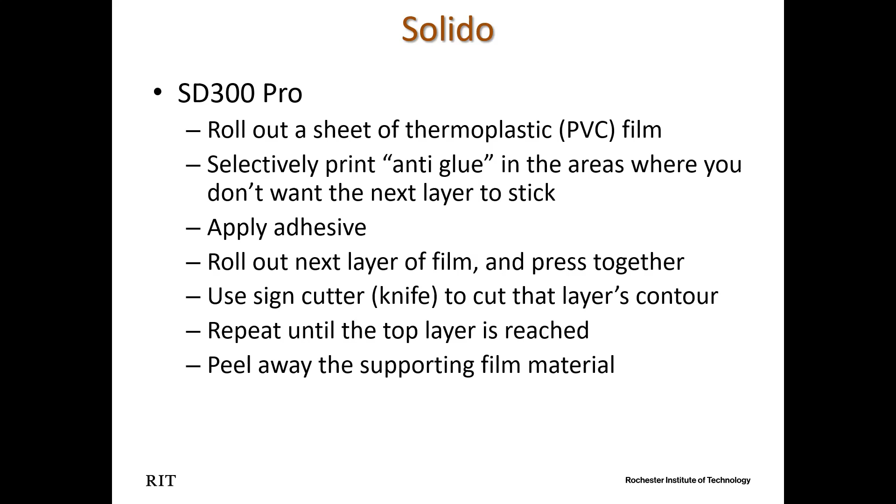Basically the idea is still to print the contour and attach the layer to the next one. And there are different mechanisms to realize this process. And specifically in this one, an anti-glue is applied to prevent the adhesion between some of the regions and the next layer. That's how it works. So we can take a look at the video.

First, insert the engineered plastic roll into the printer. The engineered plastic roll used in the SD300 Pro is both durable and economical, giving you attractive build cost per model. Second, insert the glue cartridge.

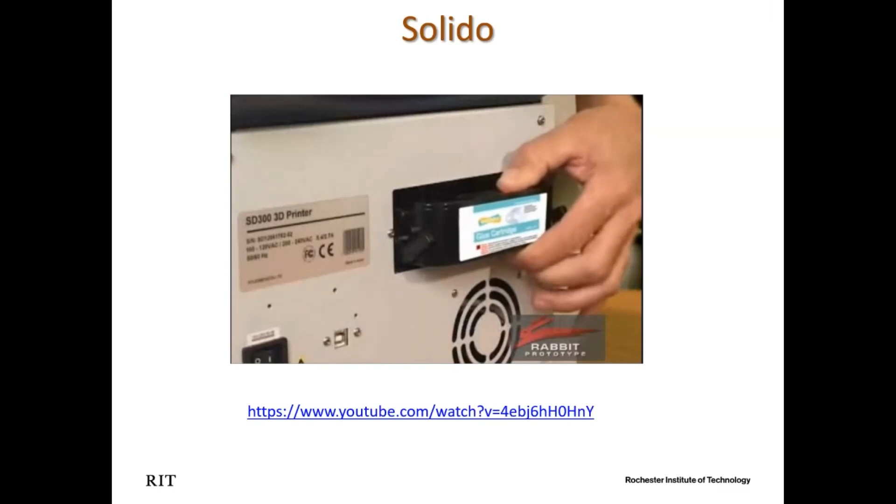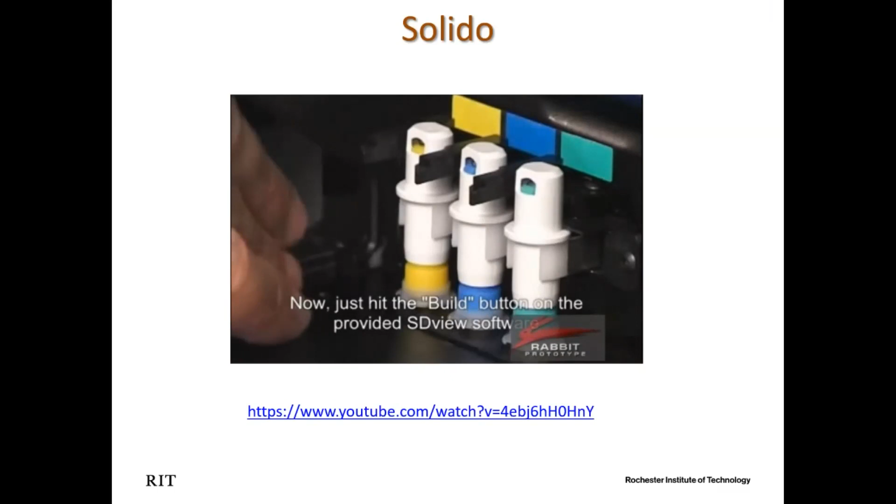Third, insert the anti-glue cassette. Finally, place the 3 anti-glue pens. Now just hit the build button on the provided SDView software and your printer is off.

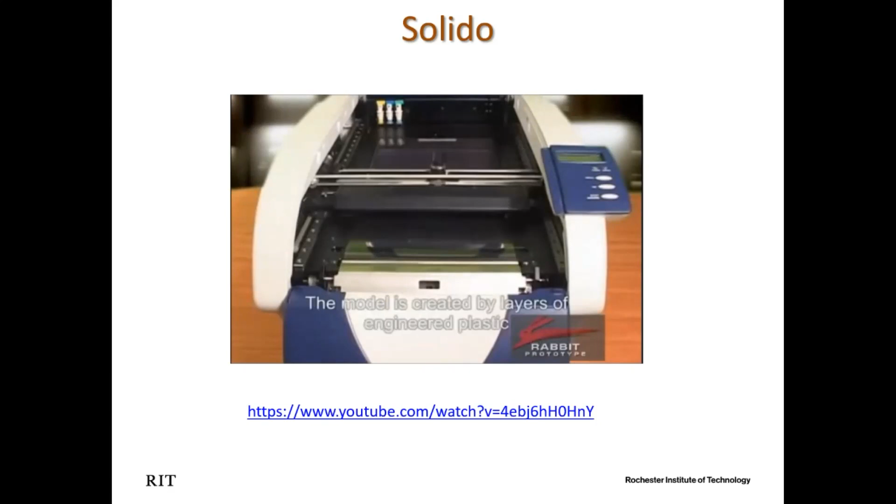Finally, a 3D printer you can afford. The model is created by layers of engineered plastic. Following sheet lamination, the cutting knife goes to work directly from your CAD data. The engineered plastic roll is layered using special glue, resulting in strong yet flexible models.

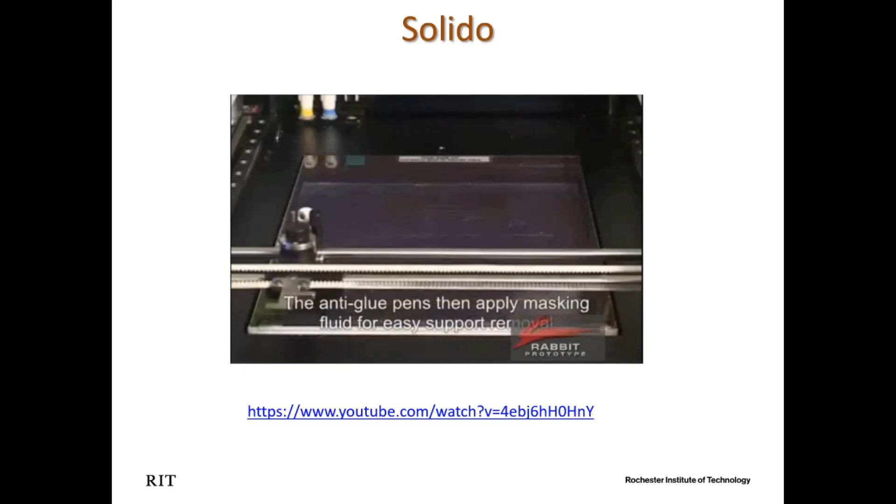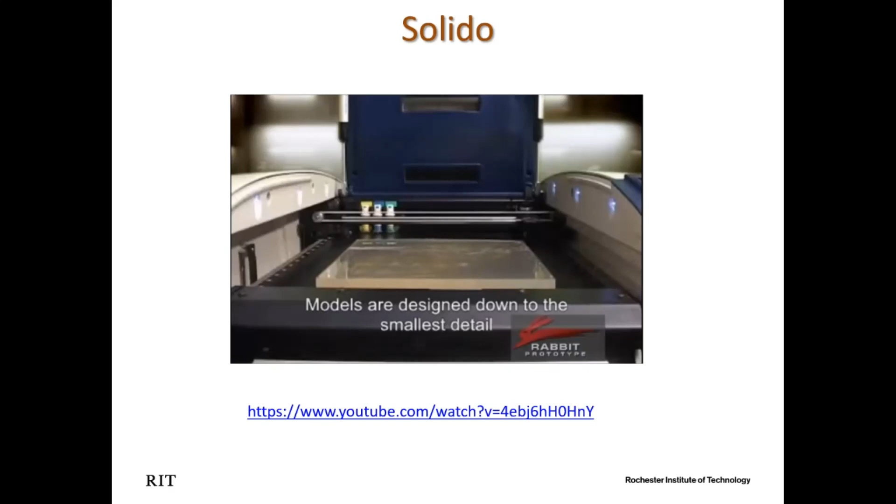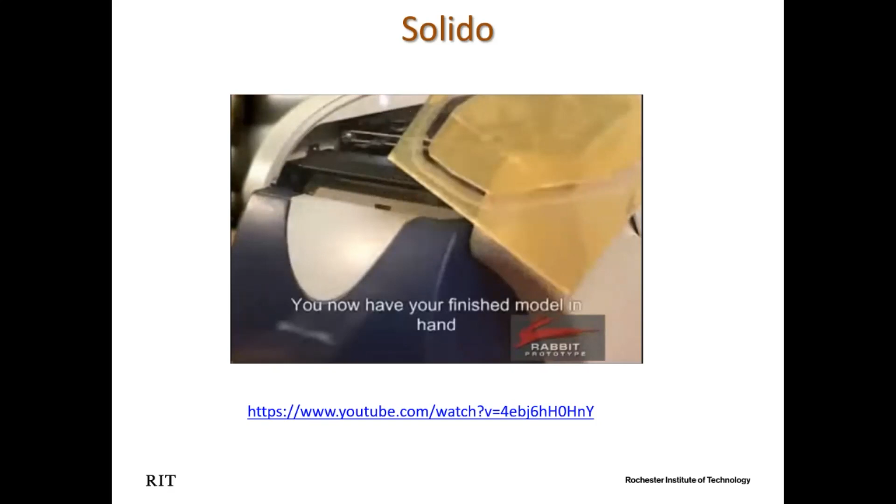The anti-glue pens then apply masking fluid for easy support removal, allowing even the smallest details to be created. Reducing development costs and time to market. Models are designed down to the smallest detail, and the engineered plastic roll is available in transparent or opaque colors. You now have your finished model in hand, ready for evaluation, without ever leaving the office.

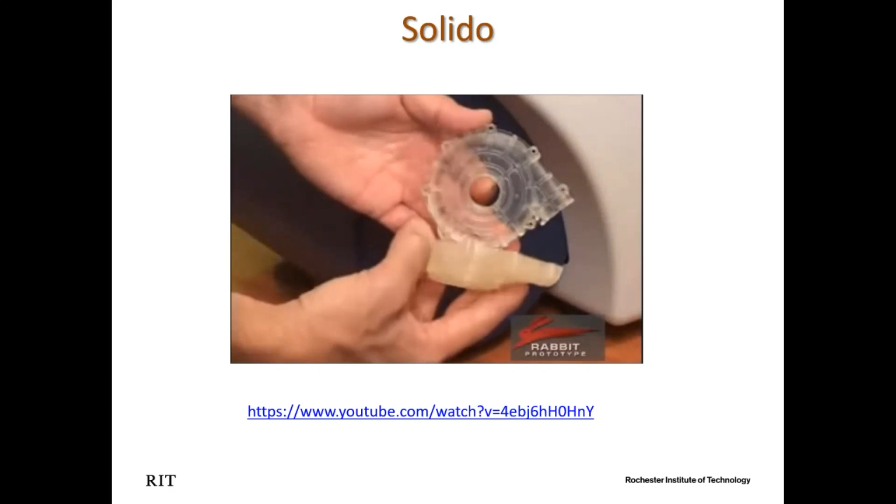Well, I would say it's a little waste of material, right? So for such a big kind of a block, only this small piece is taken out. So it's a little wasting of material, but that's how it works.

And so basically, the parts that can be built are limited to the thermoplastic material, and also there could be some post-processing to remove the adhesives or the glues, right? Basically, these glues can be completely melted in the solvent, such that they could be removed entirely after taking out from the printers.

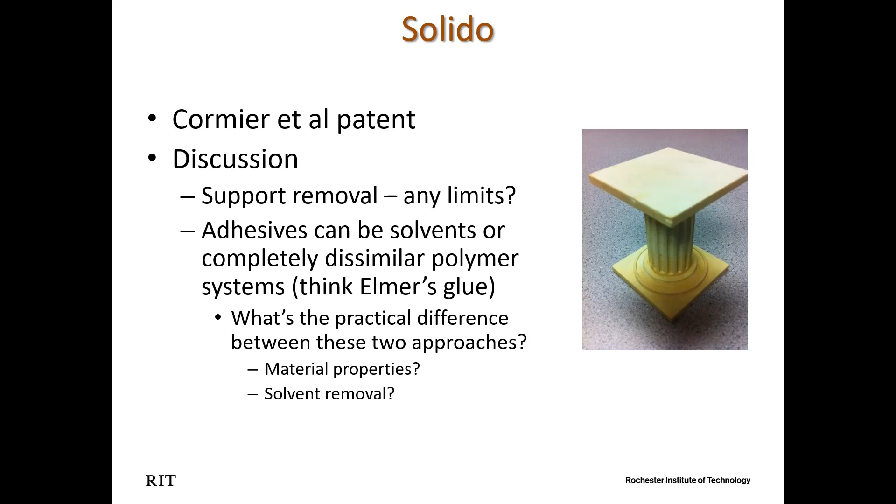Because it's a thermoplastic, you can imagine the material cannot bear too high temperature, right? And also the material property compared to other, I would say, better plastic or polymer material is limited. It's similar to what we had in the fused deposition modeling machines, because it turns out the material is very similar to what we use there, right?

Also, there are some composite sheet laminations. So what it does is there will be an inkjet printing head applied, it deposits the polymer powder onto the printed sheet, and then some of the dry polymer powder will be removed. Also, the stacked sheets will be heated up to make the material melt, and then these layers will be compressed and stick to each other.

And after all, the unbonded portion of the sheet fibers will be removed, and it turns out you will have a final shape. So by doing so, you have different materials combined together, such that you will have a polymer object, right? So this machine we talk about here is the Impossible Objects machine,

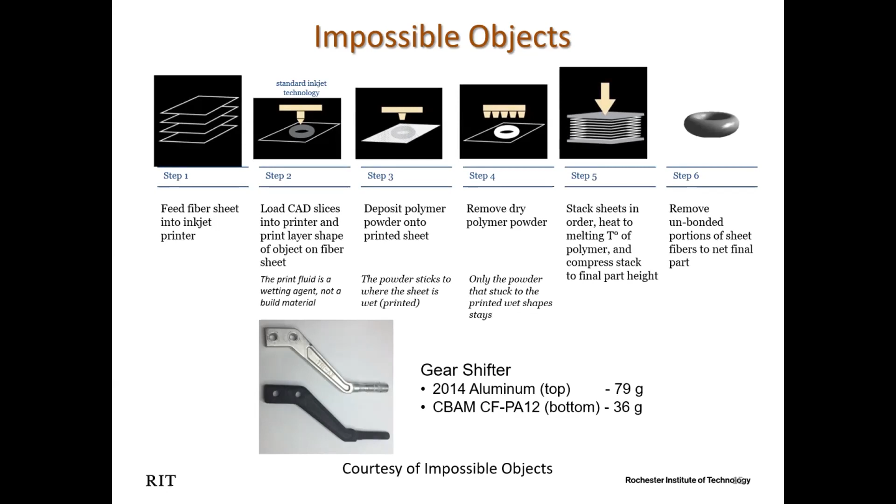and actually there's one in our lab, which is at the end of the Brinkman lab. I mean, there's a door over there, right? And you get in there, there is an Impossible Objects machine sitting there. And let's take a look at the video.

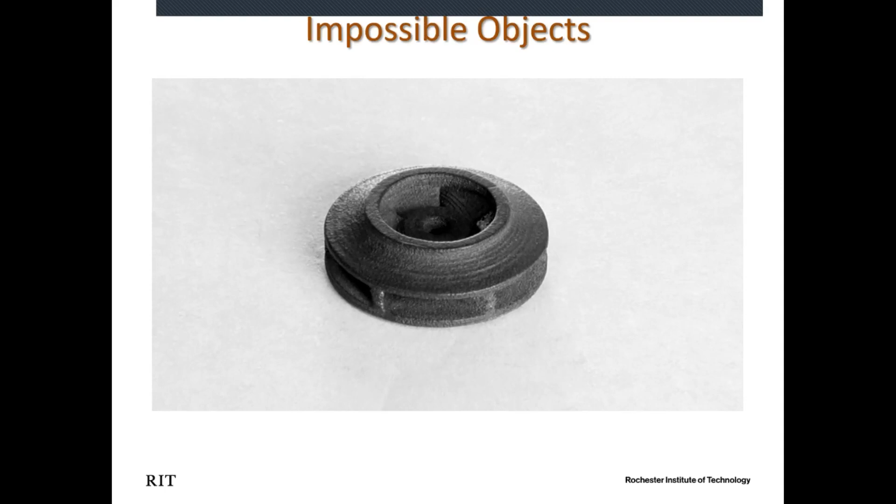Impossible Objects technology enables additive manufacturing of fiber-reinforced composites for making production parts. The CAD model is sliced into layers, and each layer is converted into a digital bitmap. Layers are printed onto fiber sheets using a clear fluid and thermal inkjet technology, and a high-precision positioning system guides the inkjet heads.

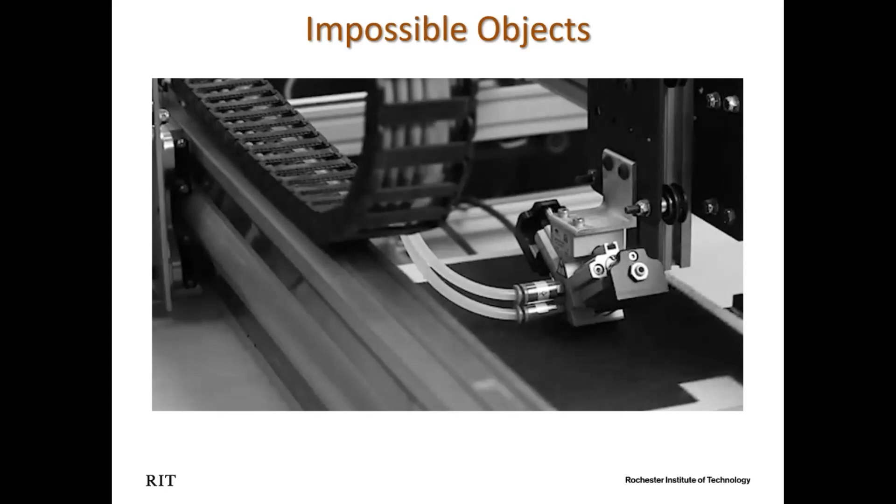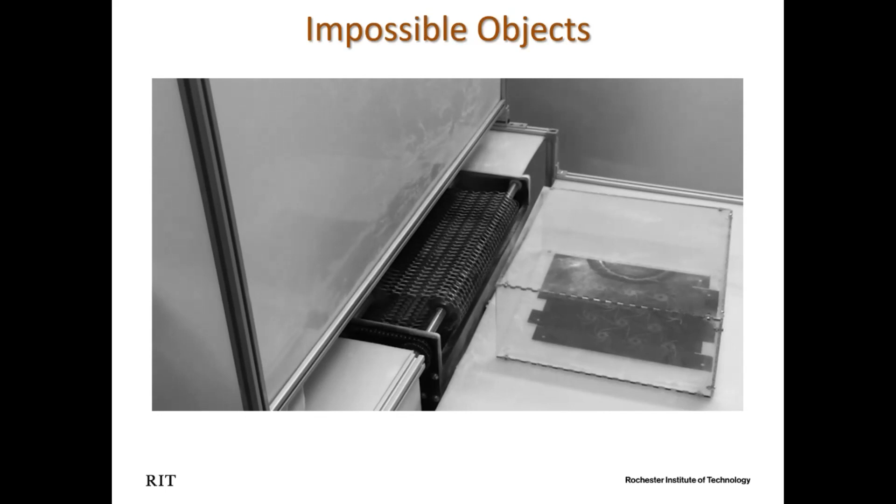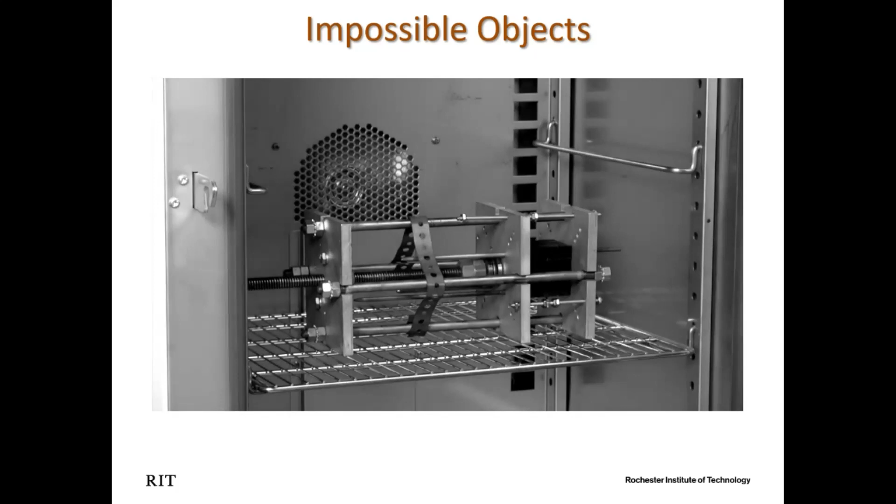Polymer powder is applied to the fiber sheet, adhering to the printing fluid. Excess powder is removed, leaving behind polymer in the shape of the bitmap. This process is repeated for all of the layers of the part. Sheets are stacked, heated to melt the polymer, and compressed to consolidate the part to its designed height. Through a mechanical or chemical process, the uncoated fibers are removed, revealing the part.

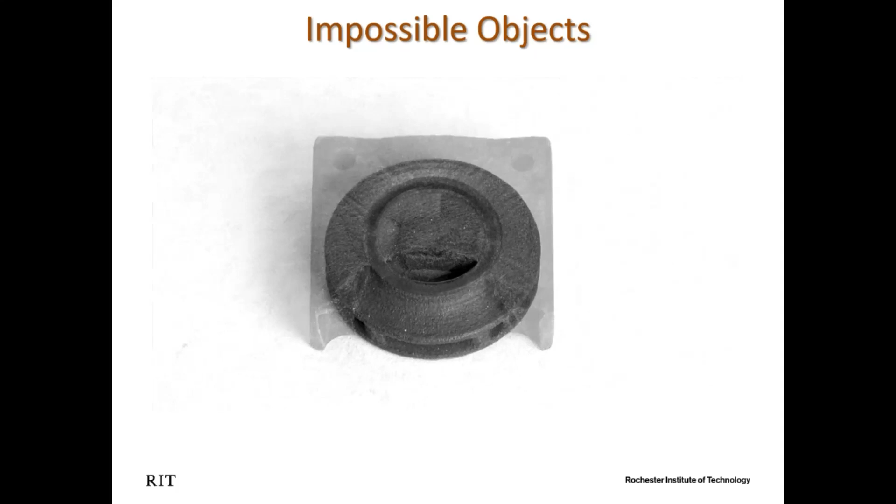So that's how it works. So compared to the Solido machine, the Impossible Objects machine could produce objects with fibers, polymer fibers inside. So in that case, the object is reinforced. It has much better mechanical properties.

Also, there's an EnvisionTEC machine, which is similar to Impossible Objects, producing fiber reinforced objects. So there are some other processes using wood sheets, right? Basically, you just CNC each of the layers and attach them together, and it turns out you will have a whole object made of wood in this case, right? Still layer by layer, very interesting.

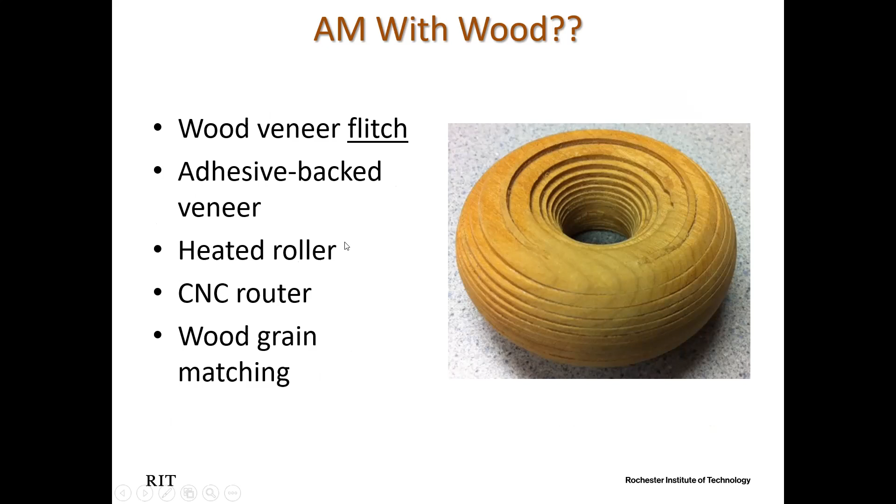And also there's a post-processing step to solidify the parts. And also, this process can apply to metal material, stainless steel material as well, to produce high grade parts.

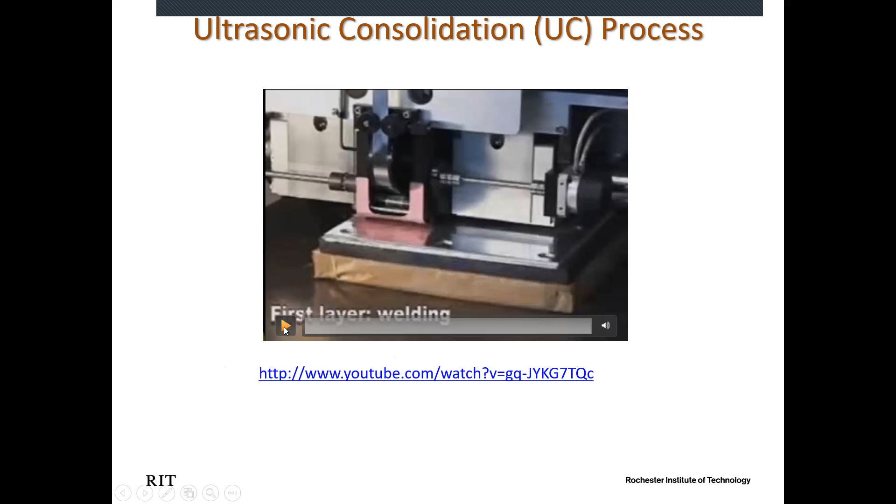Also, as I mentioned, metal is another possible material for the sheet lamination, and one of the processes is utilizing the ultrasonic waves. So it's similar to the welding process, but in a layer by layer manner. Let me try to play the video. Yeah. See?

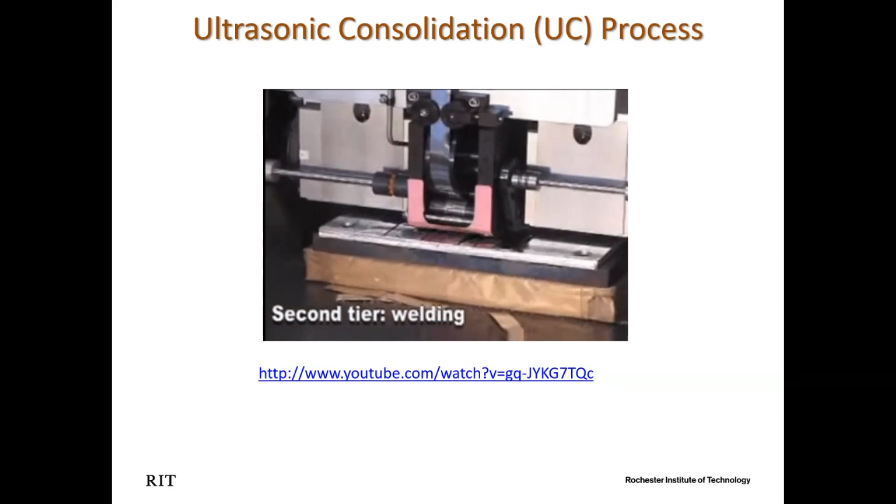The ultrasonic wave is used to melt the metal sheet and attach it to the build platform, and then another layer is added on to the newly built layer, and so on and so forth.

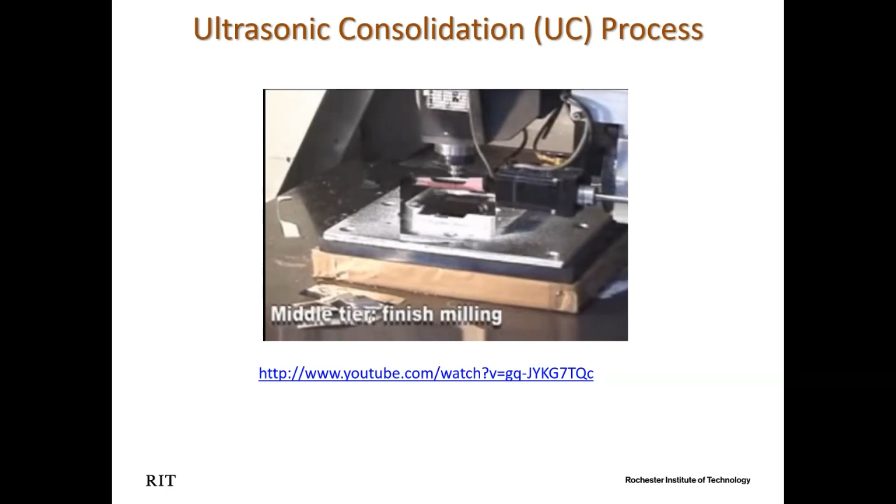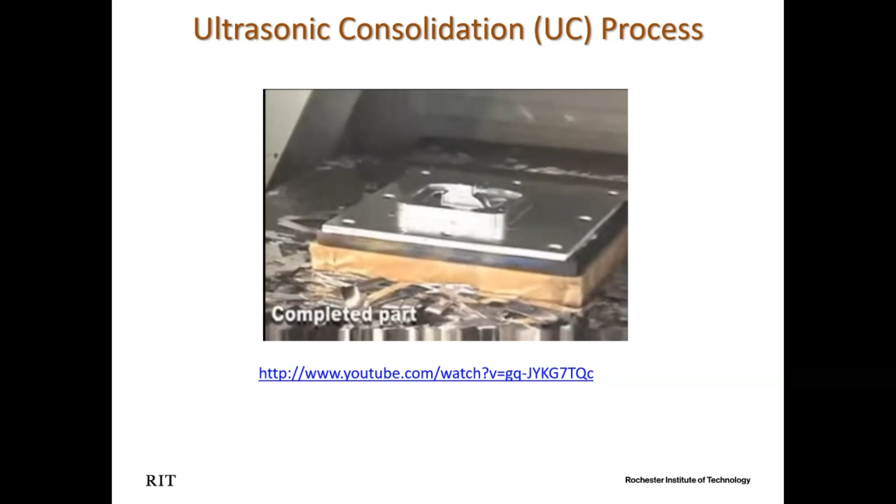So there is another subtractive process to produce those features. It's basically the combination of subtractive and additive processes, and they work together to produce metal parts out of the sheet metals.

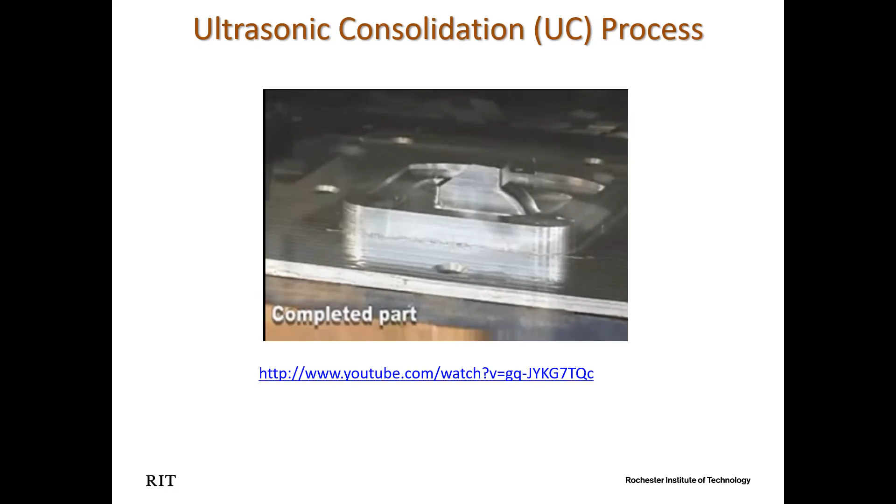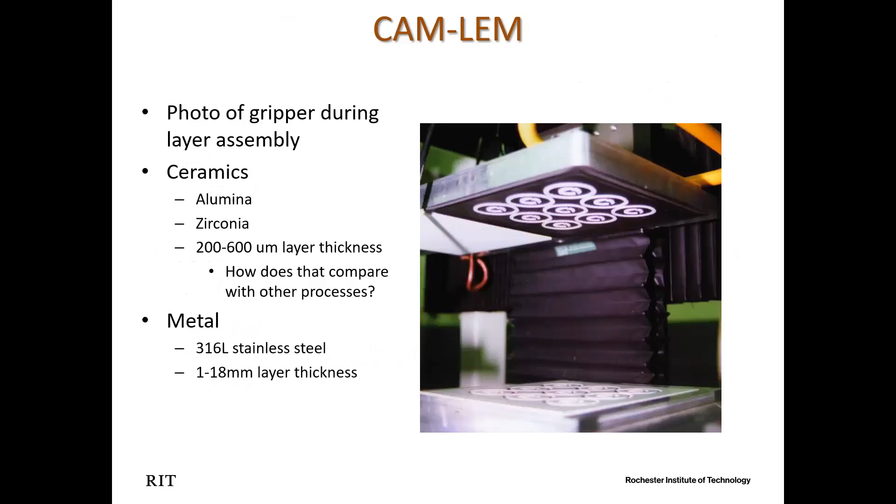Professor, I have a question. Sure. I don't understand in the ceramic process, how are the pieces joined using ceramic sheets? Because I don't understand if only the heat and the compression solidified the shape, or do you use anything?

I'm sorry, I skipped the details, but there is a binder. Basically, it will be glued together, just like the ceramic powder-based processes. So yeah, there will be a binder. Let me draw here.

It's just because in the sheets you can add zirconia, for example, and these are one kind of biomaterials. So it depends on the binder if it's compatible or not. So for that reason is my question. Oh, that's a good question. So for that, I'm not so sure about whether the binder is compatible or not.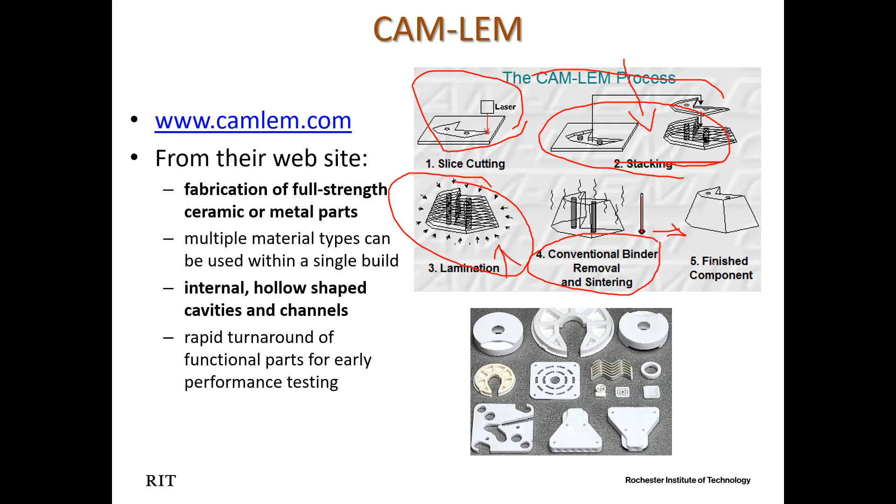So for this process, I don't want to put too much time on it. I might stop here so you can go through the details yourself. But overall, you should get the basic mechanism for the sheet lamination. Instead of starting from powder or filament, this process starts from each sheet, and each sheet is basically one layer, right?

You can create the contour of that layer and find some way to combine different layers together. In this case, it's usually a glue or binder, and then remove the excess material. Also, sometimes you want to do a debinding. Not all processes have the debinding step, but some require it. And after all, you have a whole solid part.

So that's the idea of the sheet lamination process. Different ways to combine the layers, cut the contour and remove the excess material are introduced under this umbrella of sheet lamination processes. All right, and we can talk about the last lecture. Let me open it up.

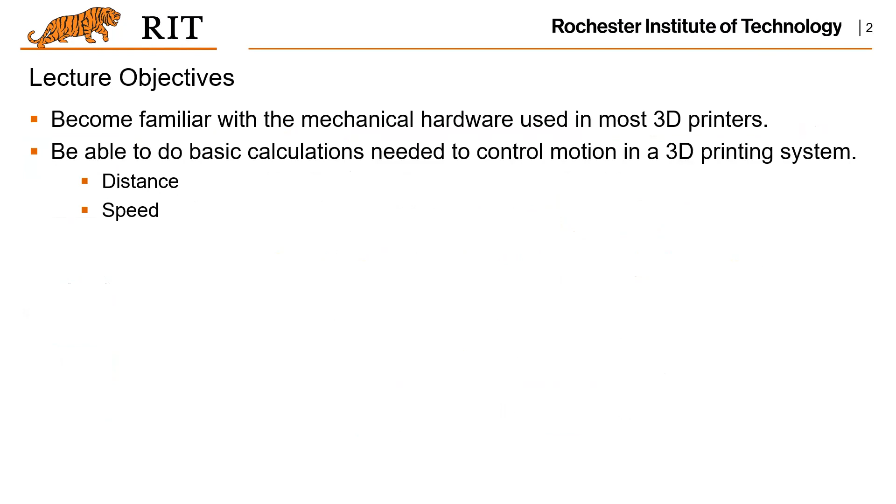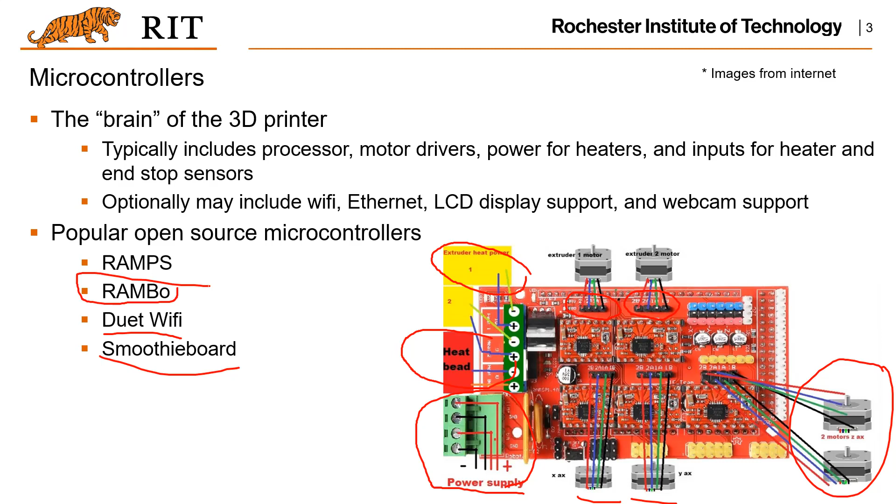So all these components work together to control the motion of the printing platform and the printing head, and to heat up the printing bed and the nozzle to realize the whole process. There are some popular microcontrollers like the RAMBo, Duet Wi-Fi, and the Smoothieboard. And if my memory is correct, the Prusa is using the RAMBo board. There is quite a lot of open-source code and applications based on these microcontrollers. These are very popular ones. Many low-cost printers just utilize one of these.

There are some other components which are very important in the printer, but at the same time, you might not pay enough attention to them. For example, these axis end stops. The purpose of such stops is to detect, when the item moves along one axis, whether it reaches the ends of the axis, the limits along this axis, or not. Basically, the 3D printer needs to know this information so that it will stop the motor, right? There are different sensors, and based on their working principles, we can classify them as mechanical based, optical based, and magnetic based.

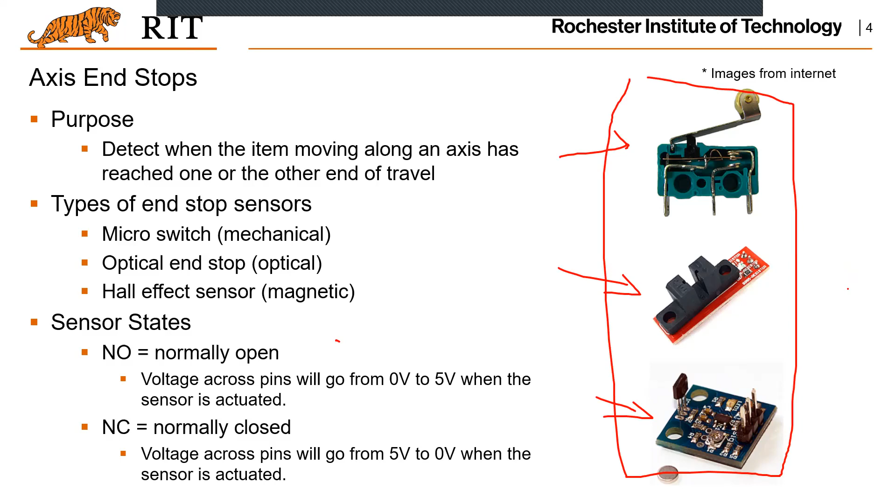Also, there are temperature sensors, right? Thermistors, thermocouples, and RTDs. Why do we have different sensors? Because each one can be used in different temperature ranges, since there are different processes under different temperatures. So you have to find the one which is applicable for such a temperature. That's why we have thermistors, RTDs, and thermocouples. If you ever learned about material processing or other courses, you should have some idea about the working principles of these sensors. Let me just skip the details. You can check them yourself.

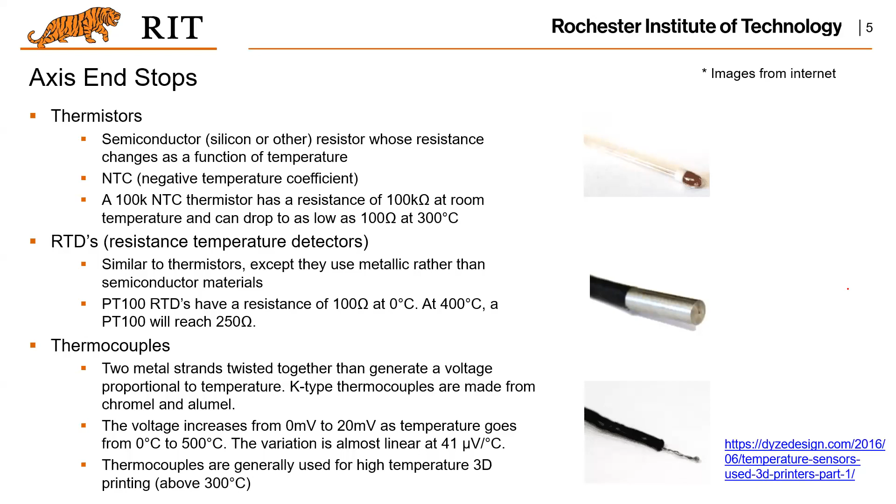Another thing is the control of these mechanical parts, as well as the temperature control. The PID control algorithm is a widely used one, which is robust in many control applications, and it is also used to control the temperature of a 3D printer. The advantage is that it controls the temperature of the heated elements, the printing bed or the printing head, with a quick response time, and it has no overshooting. That's a very important reason to have PID control in temperature control processes. In many 3D printing processes, temperature control is the key, right? So that's why we really want a very robust temperature control.

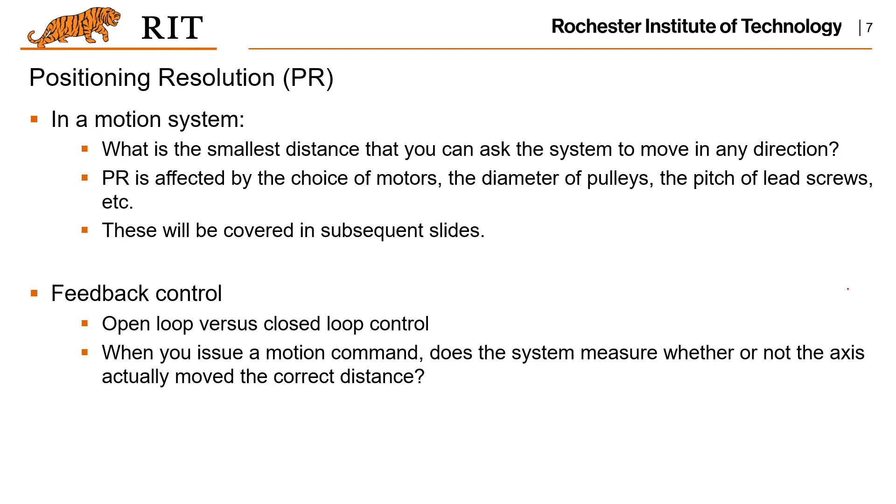The motion is expected to be controlled in a feedback control loop, such that if something happens, the control algorithms will make adjustments according to what it receives. This control strategy will be more robust than open loop control, so closed loop control is more desirable. It takes the feedback and makes adjustments, so the motion will be more stable in the process.

There are different motors for 3D printing systems: DC motors, servo motors, and step motors. For the DC motor, when voltage is applied, the motor turns, and the speed of the motor is proportional to the voltage.

For the servo motor, there will be an encoder that controls the motion of the motor. For the step motor, the motor is operated by synchronized pulses that cause the shaft to rotate in fixed steps.

From those descriptions, we can tell there will be more control for the servo and step motors, not just simple DC motors. The step motor can be considered as a combination of a DC motor together with synchronized pulses, but a simple DC motor has no such control—you have no fixed step.

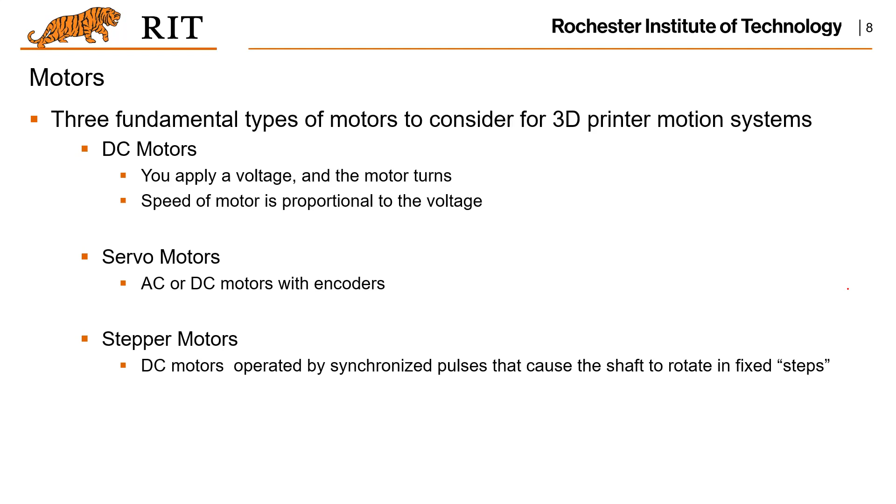The servo motor is more accurate, since there is an encoder involved in the control, giving you very precise control over the rotation of the motor, and therefore very precise control over the motion driven by servo motors.

For a step motor, a pulse is utilized to control the motion. A pulse means discrete signals, with a time period in between two pulses. When a pulse is received, the motor rotates its axis, and in between pulses it remains static. That's how the step motor works.

In each step of the motion, the motor has a rotational increment, which is the minimum motion this motor could provide. That's how the positioning resolution is realized by step motors.

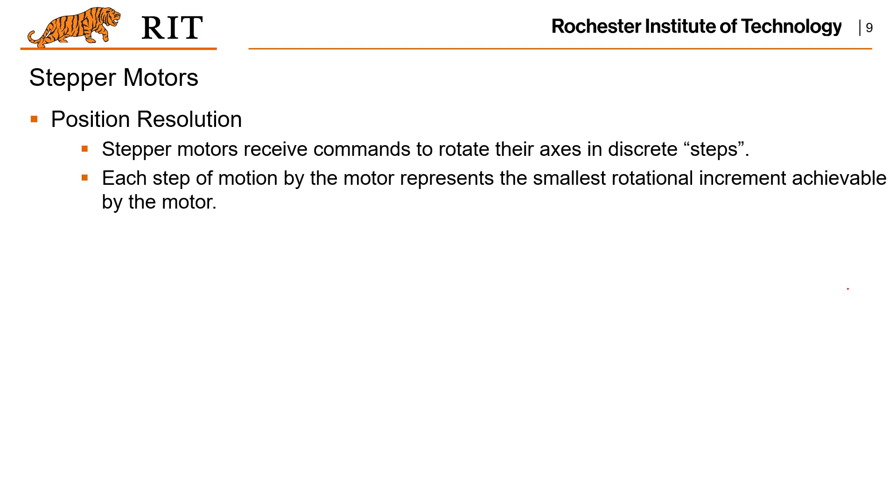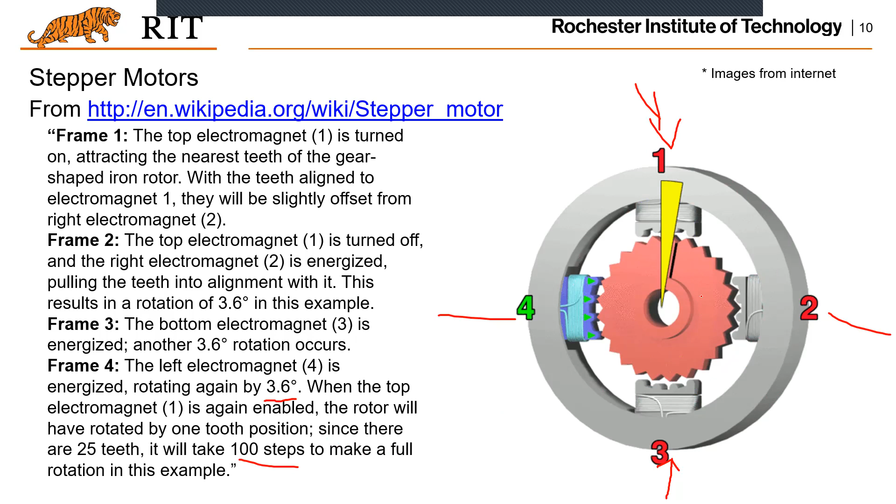Let me try to play this video.

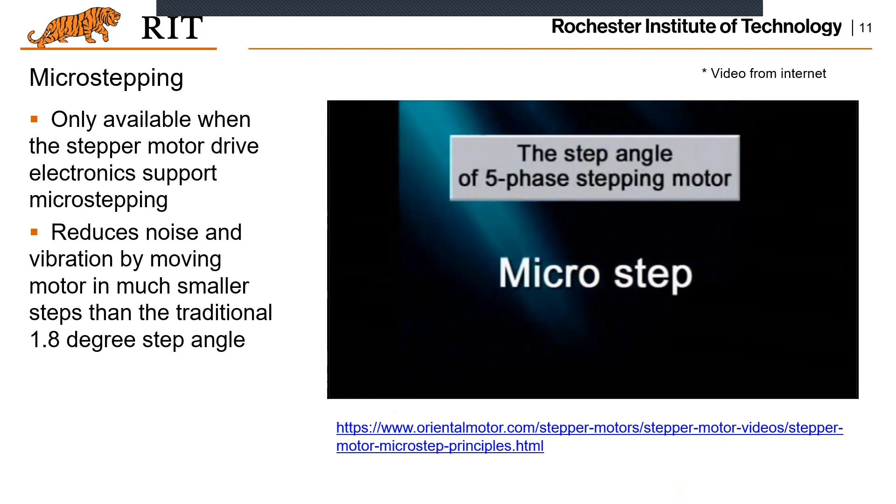The stepping motor can be controlled by a micro-step drive technique. The micro-step is a technique to electrically segment the step angle for reducing the vibrations and noise of the stepping motor.

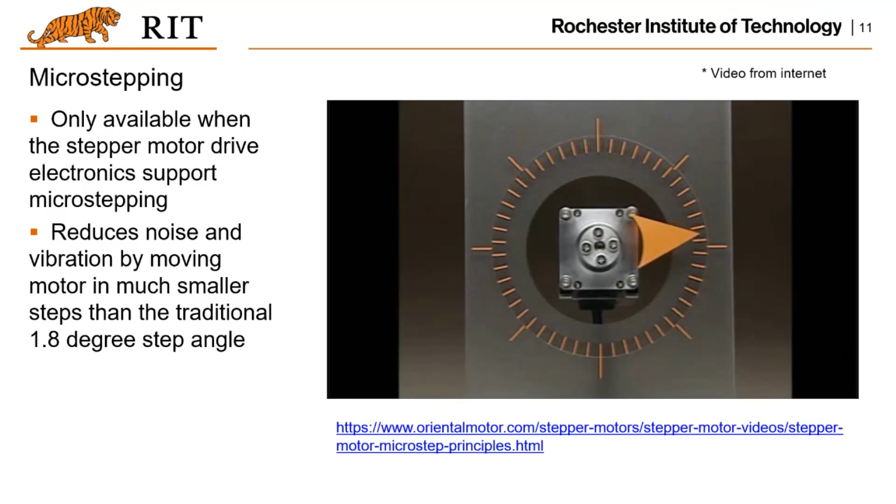Now we will see the operating principles using the 90-degree step model. The power of the magnetic field where the electromagnet is generated is in proportion to the current size flowing in the coils. We will turn on 9/10 current in the S1 coil and 1/10 current in the S2 coil.

It is drawn a little towards the S2 coil by the amount corresponding to the variance, and then stops rotating after a little. If you change the ratio of the currents, you can drive with a smaller step angle than conventional step angles.

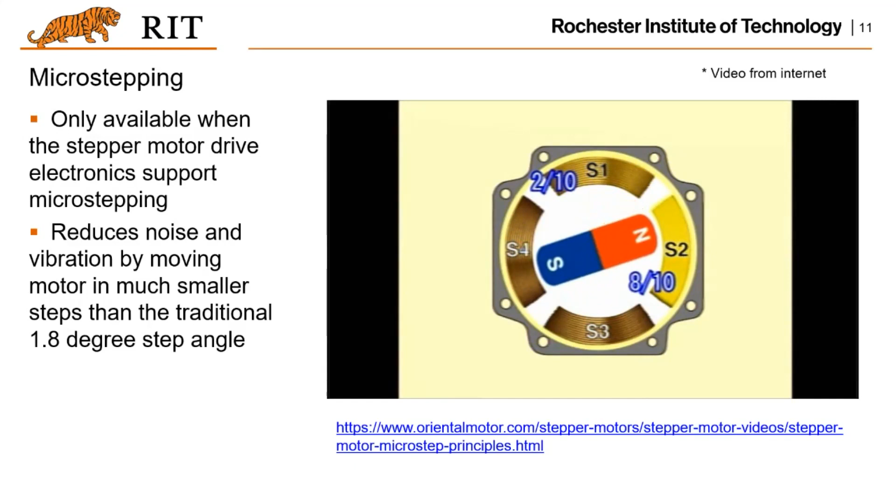It is possible to break the basic step angle of 0.72 degrees down to 1/250th, which is 0.00288 degrees. This technique allows you to use a minute angle feed for smoother operations. This is ideal for applications which prohibit vibrations or noises, or require a minute angle feed. This is also good for applications to reduce uneven rotations at low speeds.

As you can see here, by manipulating the current for each of the coils of those electromagnets, micro-stepping could be achieved. It will reduce the noise and vibrations because you have control on the motion of the motor in much smaller steps, and that could make this micro-stepping desirable. Also you could have much smaller steps compared to the original step angle, right?

So let's say you have a motor with, let's say, 200 steps per revolution. Then how many degrees will the motor turn per step, right? Because you have 200 steps per revolution, and for one revolution it travels 360 degrees, and in this revolution there are 200 steps. So it turns out to give you 1.8 degrees per step, right? That's how you compute these kinds of steps.

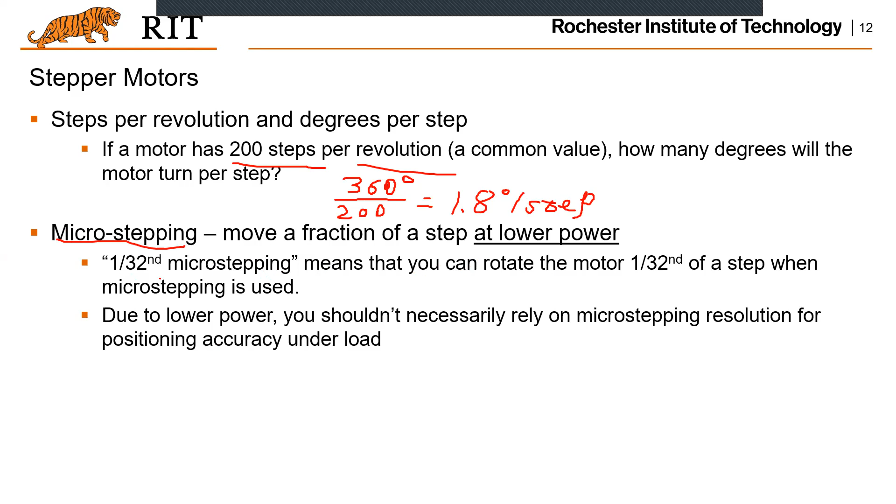Compared to the actual steps of a step motor, for micro-stepping it moves a fraction of a step at a lower power. For example, if you have 1/32 micro-stepping, that means you could rotate the motor 1/32 of a step when this micro-stepping is utilized. So in this case, you have 1.8 degrees per step, then for micro-stepping you will have 1.8 over 32 degrees per step. You can compute what the number is, but that's how you tell if you have such micro-stepping numbers, right?

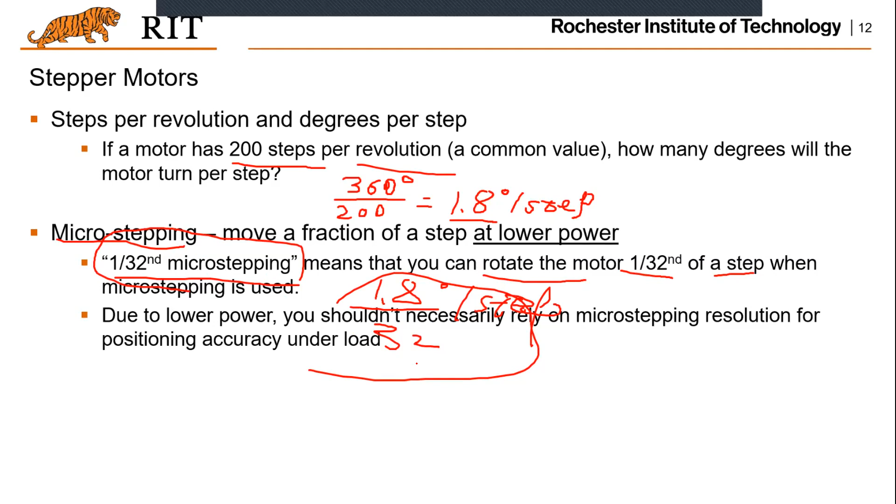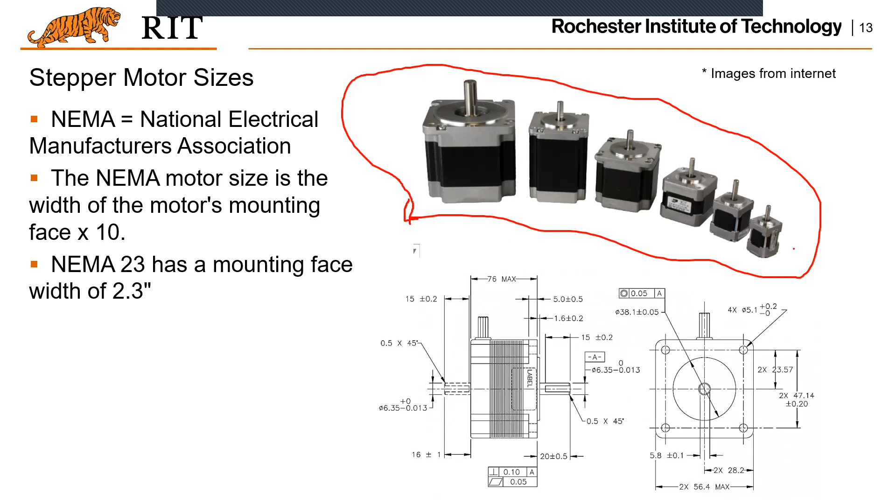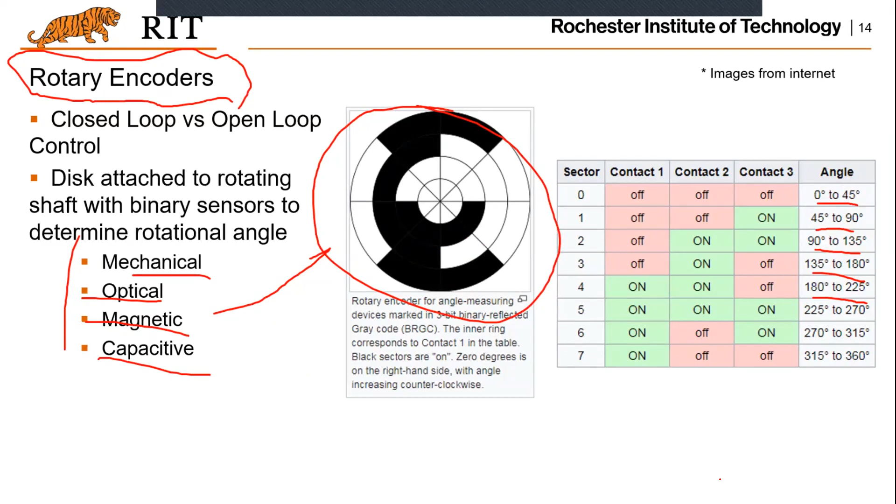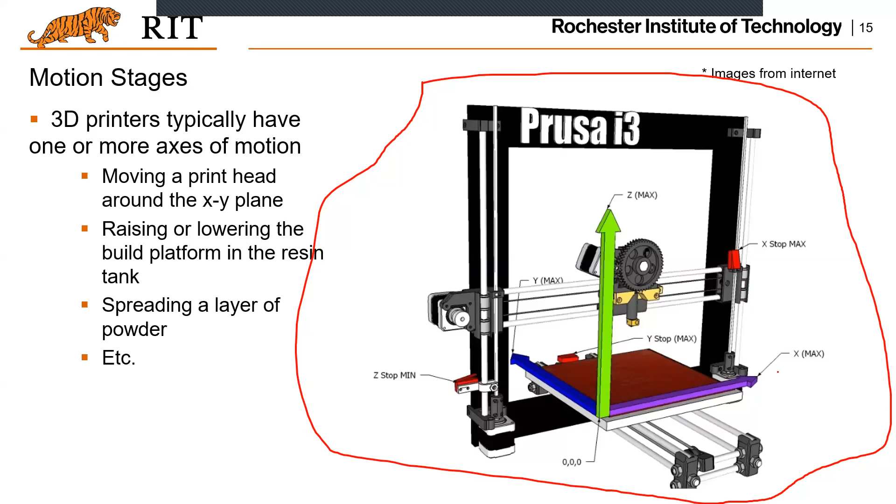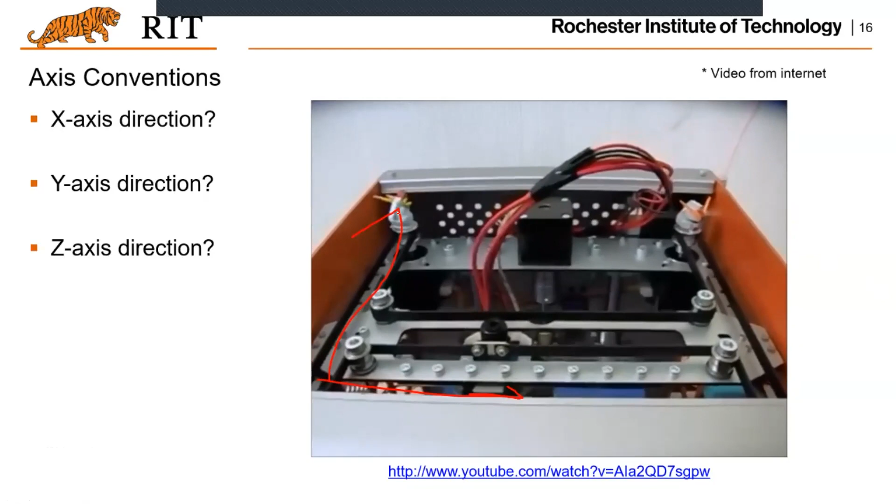When you have a physical build platform, you want to associate these physical directions with the ones you have in the software. There are different axes for the physical printer. So for example, like the one shown here, this and this would be X and Y, and perpendicular to this plane, there will be the Z direction, right?

So for the XY stage, usually there will be a belt and pulley together with a step motor, which is used to control the motion of the belt and the pulley. Also, there are rails and bushings.

Basically, the positioning resolution of the XY stage motion is pretty much determined by the step motor's resolution together with the pulley's diameter.

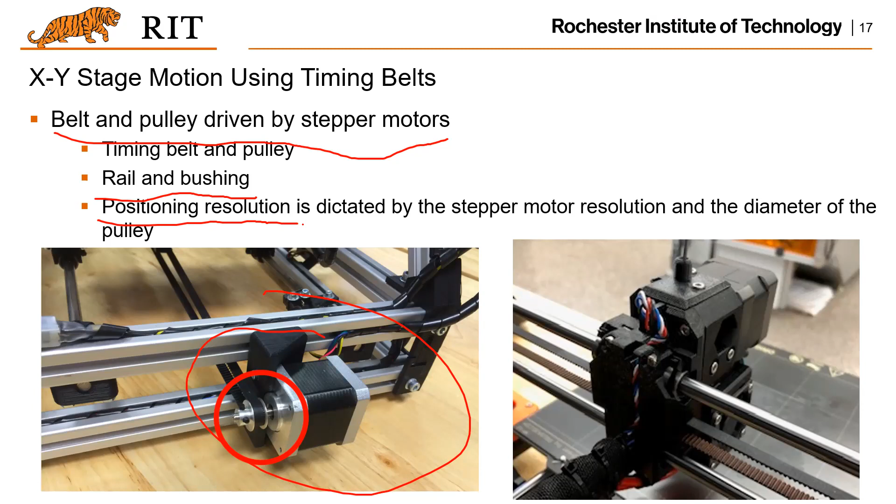And for the rail support systems, a big problem is the friction. If the friction of the rail is too big, that will definitely affect the stability of the XY motions.

That's why there are bushings which are self-lubricant bronze. For such bronze, there are small pores on the surface, and for each of the pores there will be lubricant applied prior to assembly. These are very small pores, so the oil will always be there - the lubricant will always be there, such that you do not need to apply lubricant again. So that's how this self-lubricating bronze bushing works.

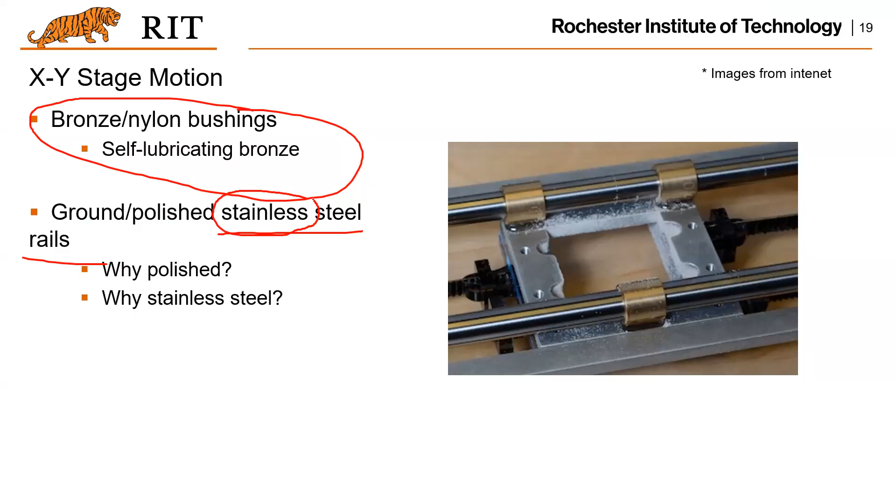Also, the stainless steel rails need to be polished, and the material itself is stainless. Again, friction is critical, so you want to always minimize friction. That's why you want to polish the rails and use the stainless material - to prevent friction and rust.

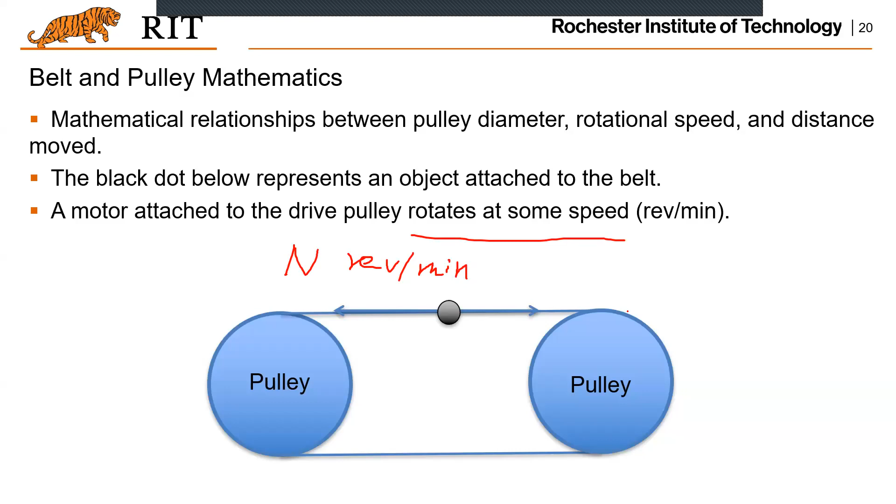If you have a diameter of the pulley dp, then for each rotation of the motor, how far will the black dot move? To compute that, think of for each one rotation, this pulley will also rotate one rotation, which is 2 pi, or 360 degrees in radians. That means this point travels pi times dp. And since these two points stay relatively static during travel, this point also travels this much - so that's the motion of the point, pi times dp millimeter per revolution.

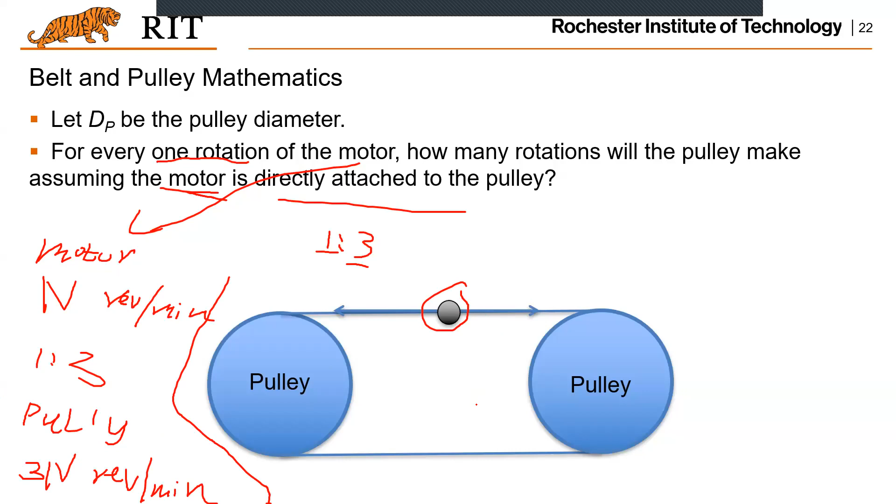It's clear, right? So I think we have derived this, right? But I can rewrite it again. And again, let's assume the motor is directly attached to the pulley, right? That means one rotation for the motor, there will be one rotation for the pulley. And there's n revolutions per minute.

Again, for each revolution, this dot travels pi dp, right? But still, you want to do some unit conversion, and that's n revolutions per minute, and the pi dp, that is millimeter per revolution. And again, convert the minute to second.

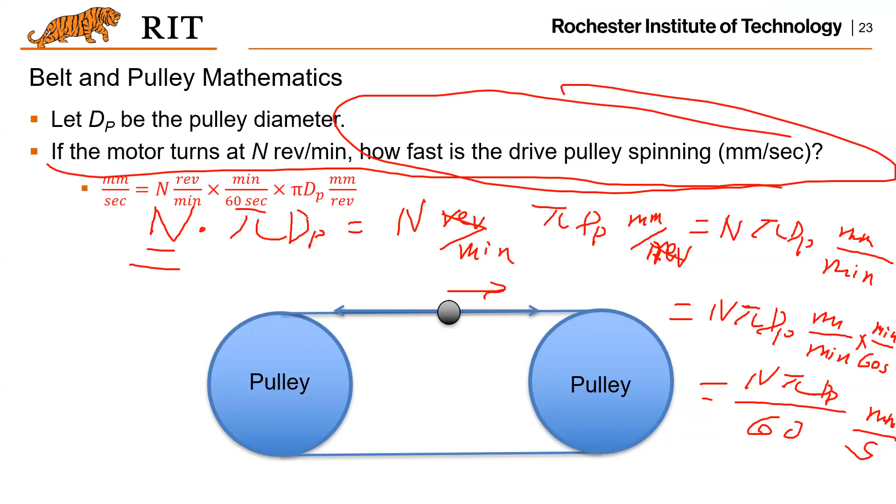Again, as I mentioned, if you already know the speed, also the diameter of the pulley, also whether this pulley is attached to the motor directly or indirectly, no matter either case, if indirectly you have the gear ratio known, then you should be able to derive what n should be, the revolutions per minute, right? That is what you could reversely derive.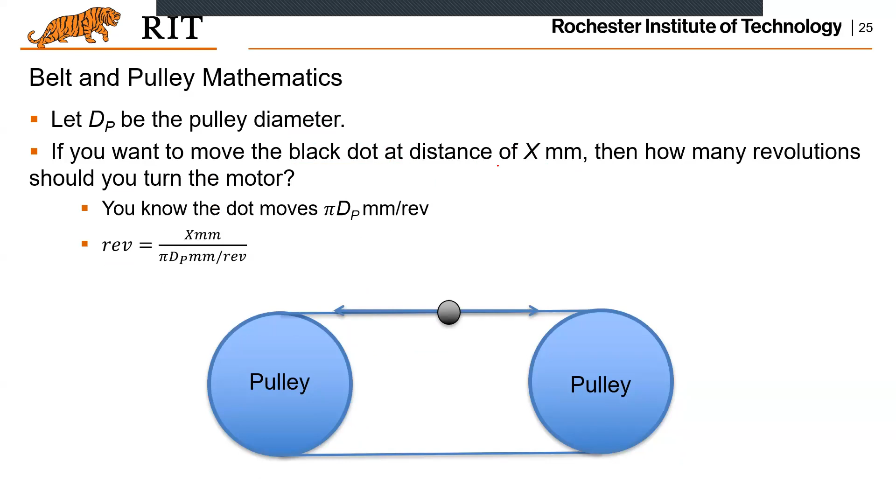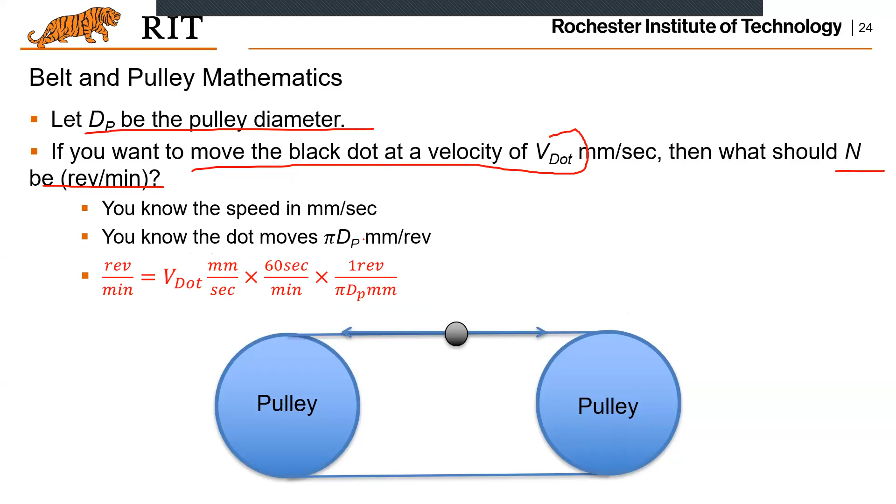And another thing is, if you know a distance instead of a speed, right? Now the question is asking you the revolutions you should have for the motor, right? That is what you want to derive, similarly to here. You already know the dot moves pi dp millimeter per revolution, right? And you have a distance, x. That means when you want to travel this distance, the revolutions needed is x over pi dp, right? So that's how many rotations this pulley should have in order to travel this x millimeter.

And again, if the motor is directly attached to the pulley, this will be the revolutions the motor has. But if there's a gear, then use the gear ratio to find out the revolutions the motor has, right? That's similar to the previous two derivations.

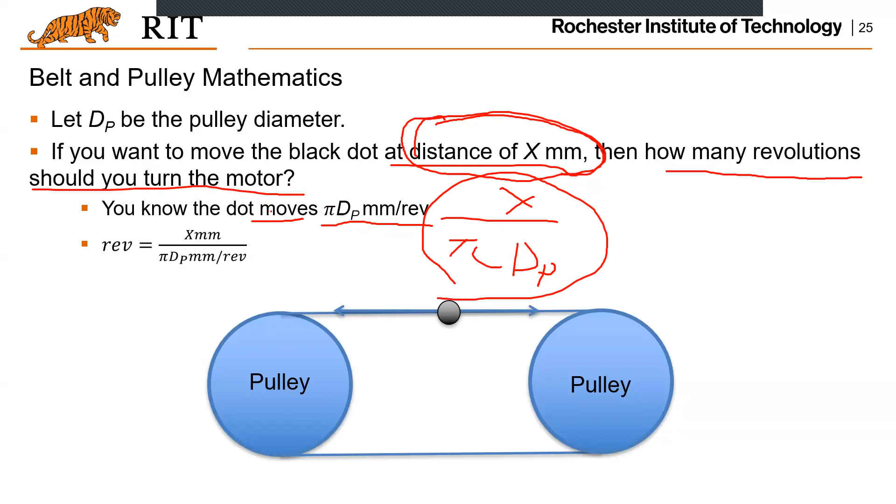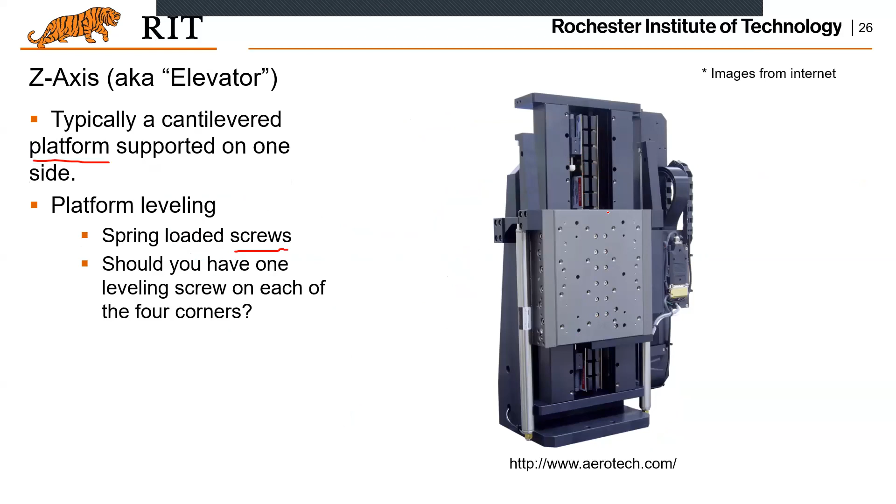In the z-axis, it's a little different. Instead of pulley and also the rails, this kind of cantilevered platform is utilized, and the key part is a screw. So the screw will convert the rotation along the screw to a translation along the direction, right? So basically the pitch of the screw will decide the positioning resolution of the Z motion.

So given the pitch of this lead screw, and this one is directly attached to a motor, then how many motor revolutions are needed to move a distance of x? So that would be a very interesting question to derive. So in this case, the motor is attached to this lead screw directly. That means one revolution of the motor will travel this pitch distance.

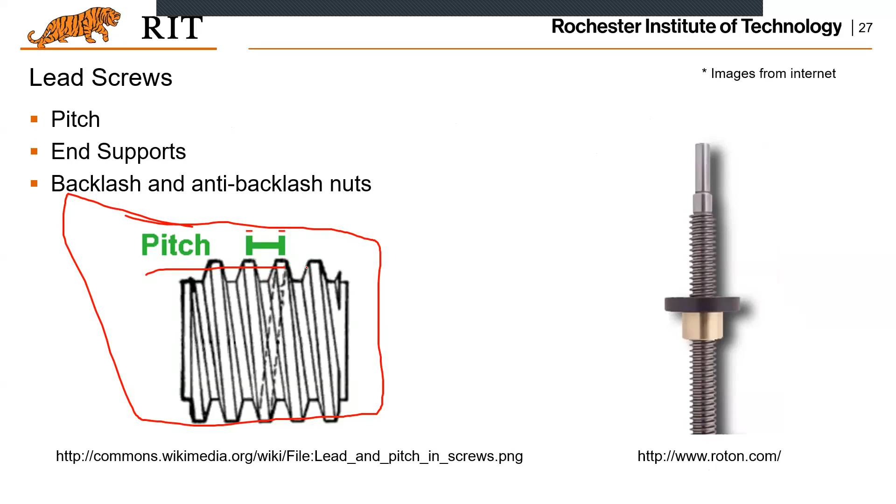I think I forgot to mention, basically the definition of a pitch is if you rotate one turn, how much distance it travels, that's the pitch, right? So in this case, for one revolution, there will be p millimeter travel along this axis. Then you want to travel x, then basically you just put the two together, and it turns out the ratio of these two, x over p, will give you how many revolutions are required, right? That's how you compute the revolutions.

But here again, we assume the motor is directly attached to the lead screw. So if there are gears, you have to use the gear ratio. In that case, one turn of the motor will not lead to one turn of the lead screw. It will be determined by the gear ratio. So in that case, use the gear ratio, right?

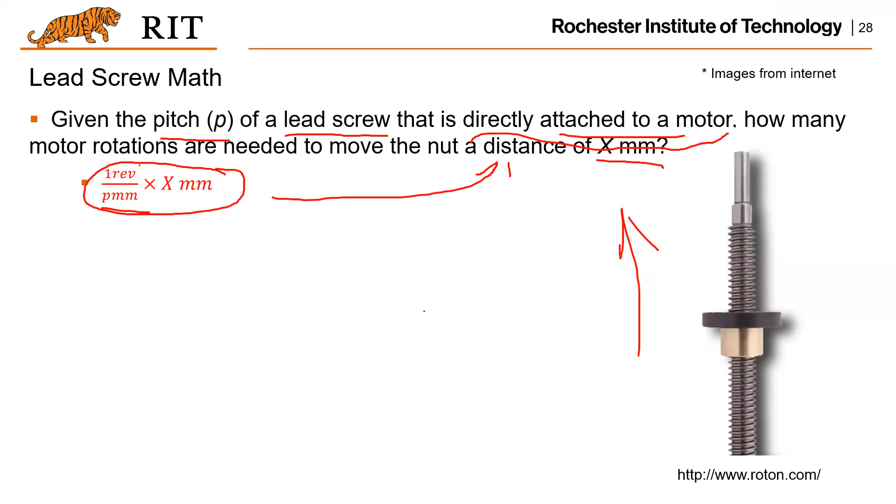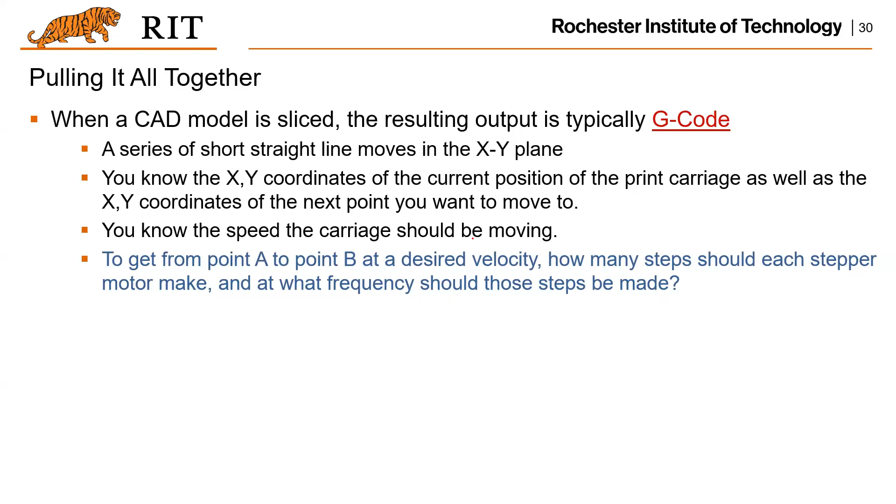So during the printing process, the belt and the pulley are utilized along the X and Y directions on the XY plane. And the lead screws are utilized to lift up either the printing platform or the printing head, such that you will have X, Y, Z 3-axis motion in this case. And here are some examples of the G code.

I mean, if you ever took the CNC machining courses, you will see it's very similar, right? It's the same thing. The G code is also utilized in CNC machining, and you can find all the information through this website explaining each of the commands. And there are some customized commands, meaning you could define your own motion under that command.

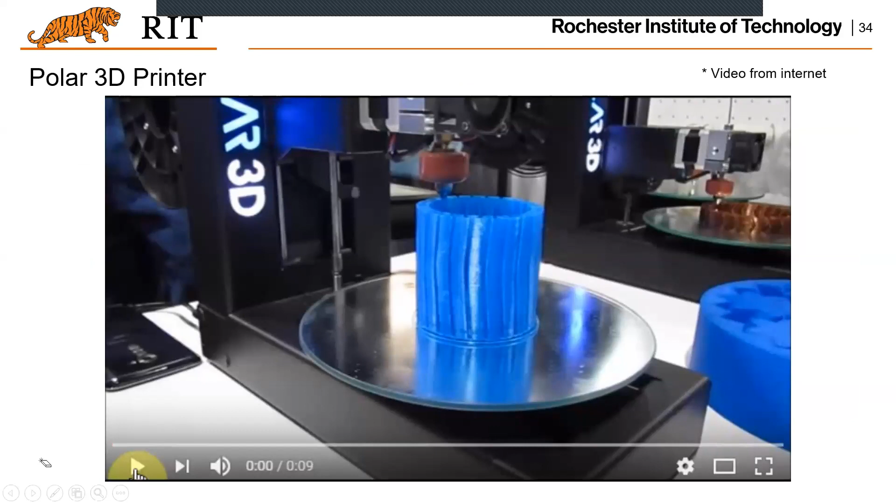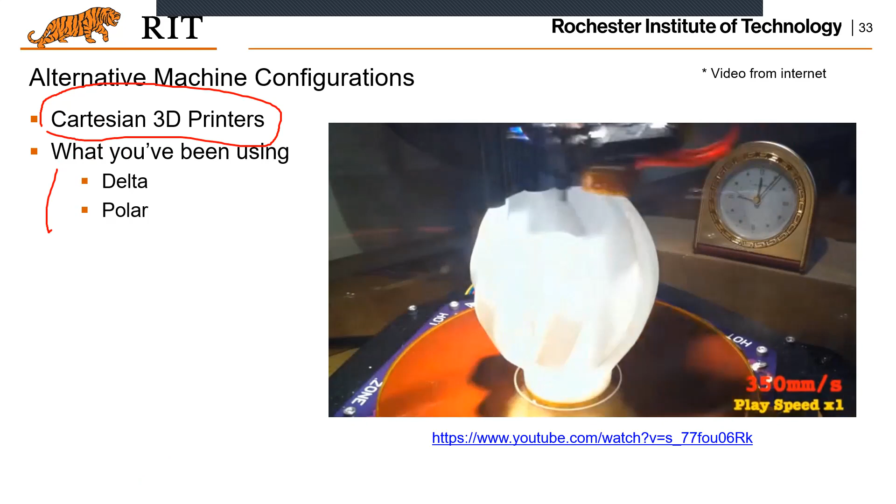Also, there are some other configurations for 3D printers. So far, we talked about Cartesian 3D printers, meaning you have X, Y, Z, 3 orthogonal axes. But there could be a delta printer or polar axis printer. Let me show you. This is the delta printer. Basically, it has a delta mechanism. Each of the axes moves up and down, and a position in 3D space is achieved by a combination of the up and down motions of the 3 axes. So it's the so-called delta printer.

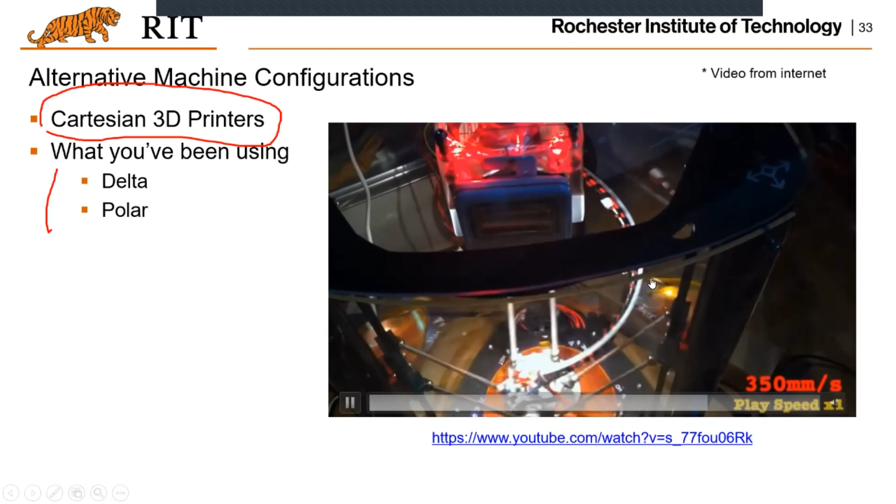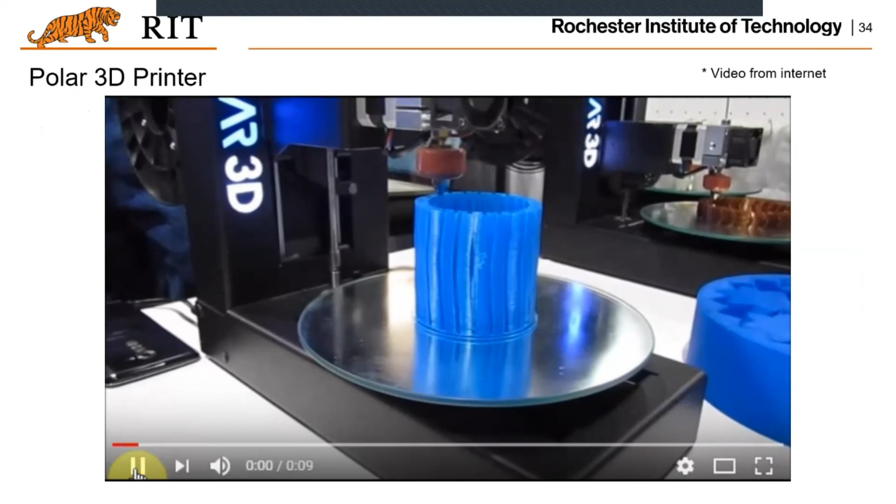Also, there are polar printers, meaning it moves like in a polar coordinate system, like the one shown here. It has a platform moving in one direction together with a rotation, and the printing head moves in the Z direction. That's different from Cartesian printers. Basically you have to convert the motor motion of the platform and the rotation to the motion required in the G code, so special software associated with the printer is required. But it's very convenient for printing rotary shapes, like a cylinder or hollow cylinder.